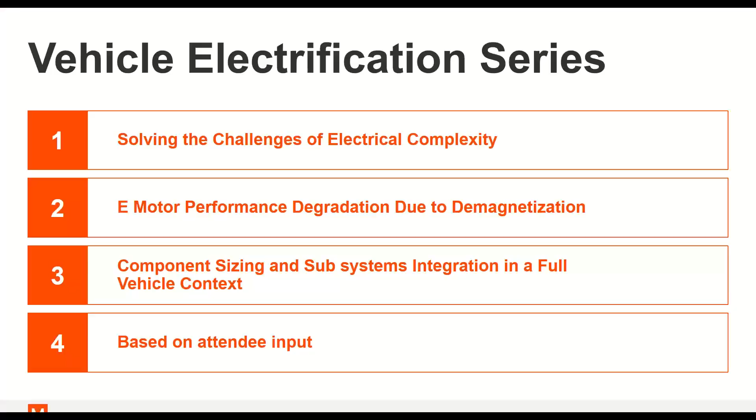As I mentioned, this webinar series is brought to you by Maya HTT, that's where I work along with Mo. Maya HTT is a leading provider of digital engineering solutions and the #1 global partner for Siemens Digital Industries software. Our history is in aerospace, but we have been working diligently within multiple industries on complex engineering challenges for the past 3 decades. In particular, there's been immense growth that we're seeing around the challenges and adoption of software and cutting-edge tools when it comes to vehicle electrification. We're excited to be working with clients all across the world, but in particular in US, Canada, and the UK in relation to this domain.

Today, we're covering only a small subset of our expertise and knowledge base, but it goes beyond electrification and beyond integrated electrical systems. One of the areas we're working on goes into helping companies create their own digital twin representations of physical models. This could be in the design and prototyping phase, in manufacturing, or even out in the field. We're seeing tremendous interest in AI applications, being able to capture data related to something active in the field and turning it into valuable information through our knowledge, algorithms, and technology. The knowledge we have of industry best practices does position us well to support our customers in achieving those goals. There's a lot more we can talk about, and if you have questions in these other areas, don't hesitate to reach out to the people who invited you, or send it directly to us afterwards. But today we're really going to be focusing on electrification and integrated electrical systems.

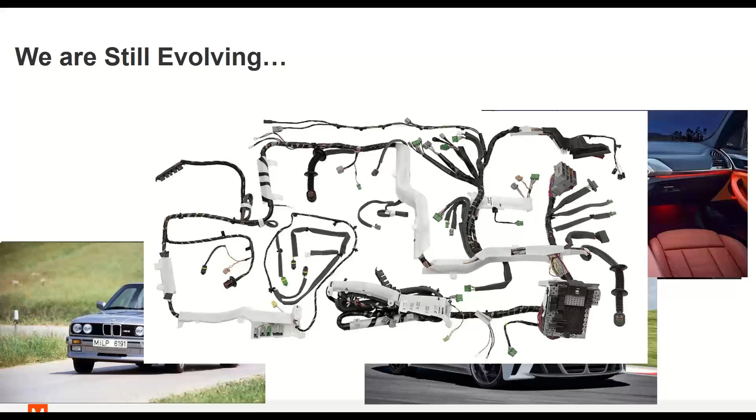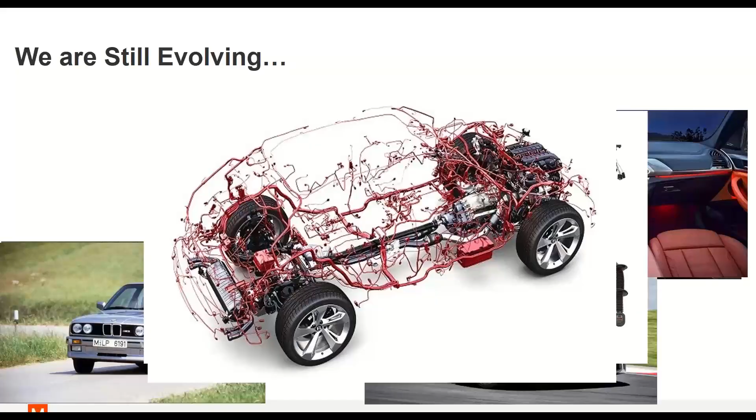Paul, can you hear me? Yeah, I can, Mohammed. You can hear me? Yes, sir. Oh, excellent, thank you very much, Mohammed. That was thought-provoking. Let me see. All right.

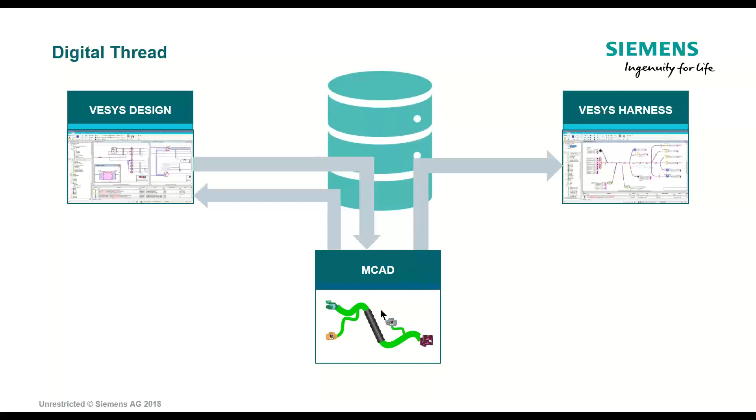And both visualizations, or both abstractions of your design, can interact with another domain through adaptive bridges. In this case, a simple representation of an MCAD system. So that's an example of a simple digital thread.

Let's just take a look at what it looks like not to have a digital thread. Like I said, electrical engineers have been traditionally poorly served for advanced tools. And it's by no means unusual to see non-specialized tools. Nothing wrong with Visio, nothing wrong with Excel. However, electrical engineers usually end up disappointed because there's no underlying intelligence or associativity. And any changes that ripple through your designs, if you use those two tools, you have to painstakingly follow through the change and check lists of things.

Specialized tools also have the potential to disappoint. If you have a specialized drawing tool just for drawing activity instead of design, then you could run into problems with change management again for engineering changes. The drawing is not itself the model, it's a manifestation of the model or a representation. So something that can manipulate a drawing may just be manipulating a representation of the drawing rather than a model with fidelity to the underlying nature of the design.

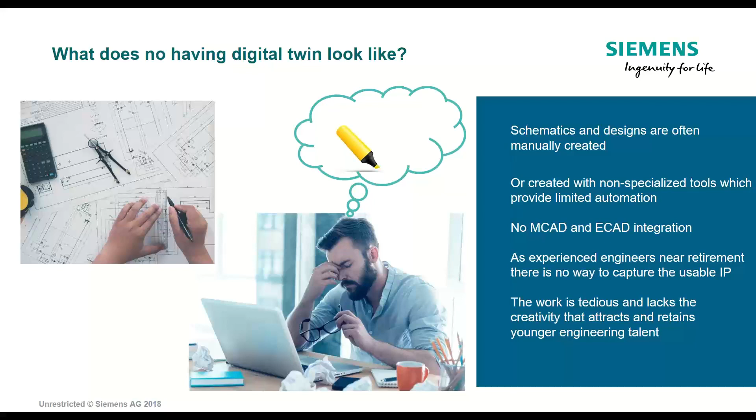So using suboptimal tools is no longer sustainable for complex designs, for big designs, for designs which change quickly, or huge projects of design. And systems like VeSys enable you to cope better with those challenges.

And from really the kind of molecular level upwards, I'm showing in the database, customers like IVI model first the individual symbols for devices and interconnects. And then the library data models enable you to model complex multi-conductors.

This is by no means the most complex that you can model, but you can see it's foil wrapped, it has a twisted shield, a jacket, and I think there's 6 conductors in there. Knowing the difference in your design as to the different cut lengths or the different terminations of these inner cores is something that a specialized tool really should deliver to you.

Here's a modular connector with different size pins, different inserts, and so on, and very many permutations possible. So the underlying library model, even with simple mechanical parts like tapes and tie straps there, is an important component of getting the schematics that you're authoring to pass the design rule checks so that you have quality assured. There's a substantial amount of design rule checks built in.

One of the things I want to talk about, referencing back to the digital thread aspect of VeSys, is this - a couple of screenshots from inside of the harness part of the tool. And you can see that there's text messaging or team collaboration opportunities.

IVI maintain a separation between the people that produce the CAD drawings and the engineers. This is a seniority and specialism demarcation that is quite common. One interesting thing about this workflow is that it's particular to IVI. There are a number of other VeSys customers I've worked with who make their engineers responsible for the drafting, verification, and modification of their own drawings. It's an indication of how VeSys can be flexible in how you deploy it into your organization.

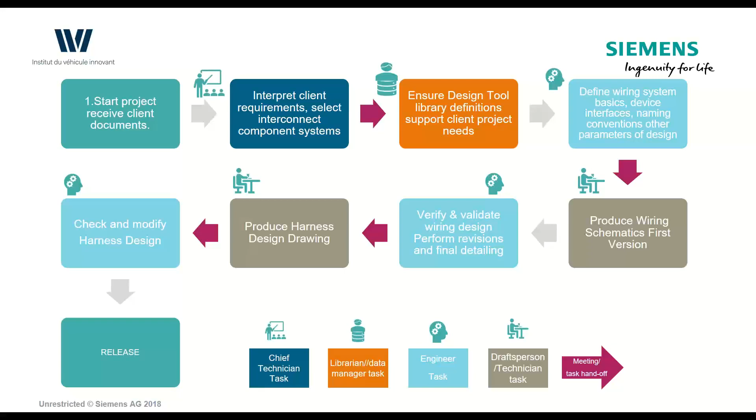So let's just revisit that straightforward digital thread. I've marked up a few of the practical consequences of using this advanced tool. If you take away one thing from Mohammed's exposure of some of the functionality, I want it to be how intensely practical your experience of using VeSys can be. It's a system that hasn't grown out of a mechanical CAD suite of tools - it's been purpose written for electrical design. Therefore, you can expect this system to just understand your engineering challenges.

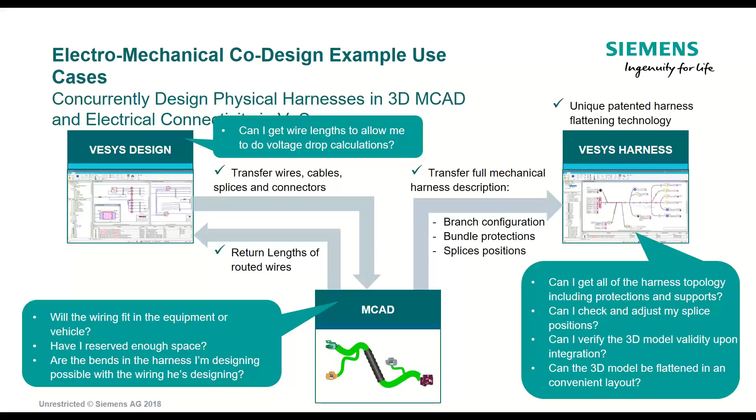The summary - I want to say three more things about VeSys. It's a mature software suite that's been proved out over the last decade by customers literally around the world. The consistency of data handling, with the sophisticated domain-specific models we talked about - the digital twins of the elements of your design - makes for a really comfortable recognition and familiarity with the functionality as you learn the tool.

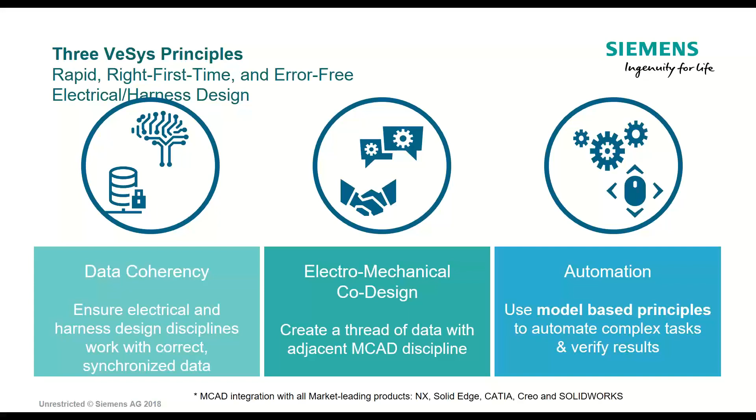And finally, the advanced automation that's possible is one of the more pleasing aspects for IVI as they've gotten into using the tool. They realized that what one customer called the gritty, repetitious manual tasks they had to do fade into the past and are no longer part of your design activity. Thanks, Mohammed.

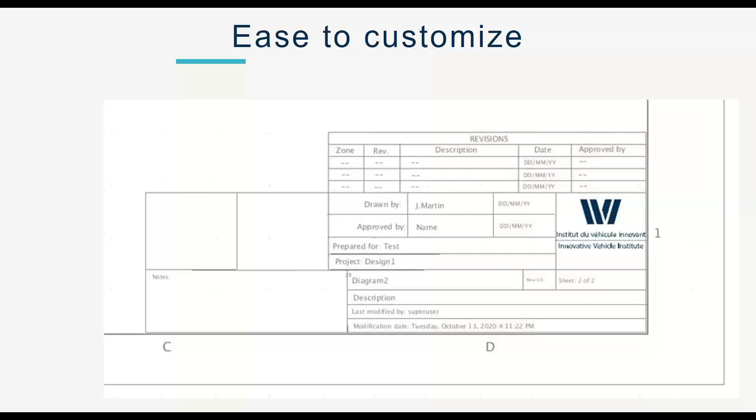The VeSys software is easy to customize. I'm showing just a cartouche here, but things that are sometimes very complicated in older software happen because they started as mechanical CAD software and then moved to electrical CAD - it makes life more complicated and difficult because it's not a seamless way to work. It's a different way of thinking because it's like a patch, instead of being a software built from scratch.

The library, I think, is the very, very important part of the software. The way it's been built enabled us - I'm showing an example here where we had a contactor with an optional part. In order to build it in the library and have it as an option when the schematics are done, it's something we've never been able to do in the past. We had to do a manual black box, and it wasn't always easy to control in the schematics, and then when going into the harness design it was an absolute mess. So I'm showing this to give you an example of the possibilities of the library.

I'm also an IPC A620 instructor, and I also teach here at the college the D620, which is harness design, and that brings me to all the information that we need from the software. When I teach the students at the college about wiring design and wiring assembly, you need as much information as possible on the drawing. We've been able, just like Paul showed earlier, to have notes from collaboration between different teams or different people working on the same drawing. It's a very, very easy way to work.

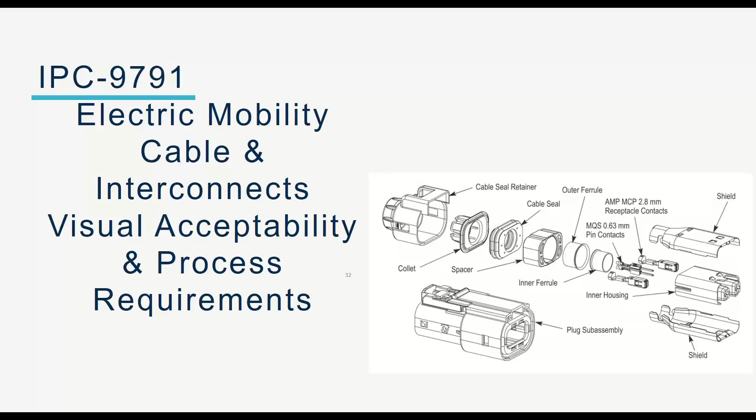We had some issues in the past when using older software, Excel spreadsheets, and Visio, like Paul was saying - these are some of the tools we used before, and we had some problems and mistakes. Now with the new tool, going from schematics to harness design and form board, I've been able to verify that there's actually no parts missing.

Yeah, I think that's yours, Mohammed, isn't it? Yes, thank you very much, Bernard, for your time and the amazing presentation.

Thank you very much. Now let's take a deeper dive into the tool Ben and Paul were both talking about, which is VeSys. We're going to break down VeSys into 5 main categories.

We'll talk about how VeSys helps you maintain an up-to-date component library, as well as establishing the links between those components. And just as Ben mentioned, it's extremely important to maintain your database. From our experience, VeSys helps streamline the process by creating links into the components and component libraries. And of course, once you've completed your first design, you'd need to validate it.

We'll discover how we can validate your design with different simulation tools available off the shelf with VeSys, in addition to tracking and exchanging notes and comments between the different engineers and technicians teams working on the design.

Electrical engineering is inherently multidisciplinary. You have different teams, different technicians, different engineers working on the same project. Integration must be provided to make sure that all the processes and documents are consolidated. VeSys is built to integrate through data exchange with adjacent domains using industry standard formats.

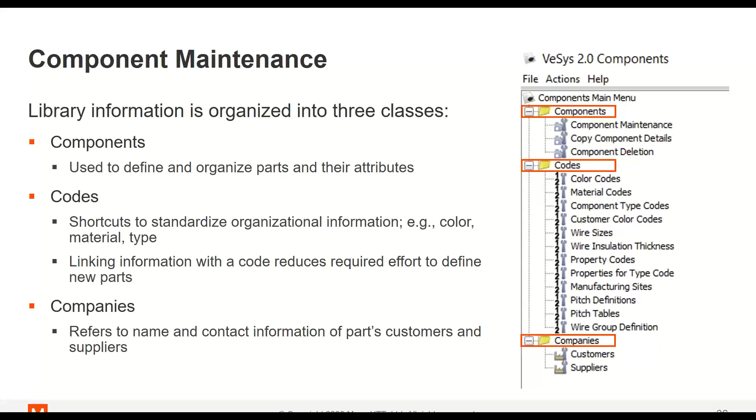And of course, the last thing is the components, to manage the components themselves, to add new components and create links between them, covering the link between all the components Ben was talking about. The idea is that by establishing those component links, the user can extend the digital thread from the components database all the way to the design.

So VeSys is not just a drawing tool. As Paul mentioned, VeSys represents the design behind the drawing, the fidelity of the design. By utilizing these component links, you'd be able to link those components and use them once established in the database. Now let's jump into VeSys and quickly build a system to show you how component links work.

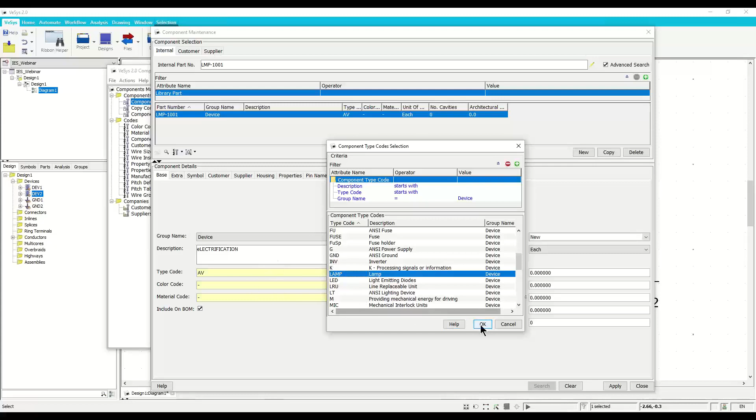The device, we're going to give it a description, call it electrification. The type code is the type of device that we're using. We're going to go into the codes that we define from the libraries and select lamp, and we have 2 pins in our device.

We also assign a symbol to the device. So we're going to go and add a new symbol, so whenever we use it, we have it there. It's going to be in electrical, and the symbol is lamp. So let's find the lamp, and that's the lamp.

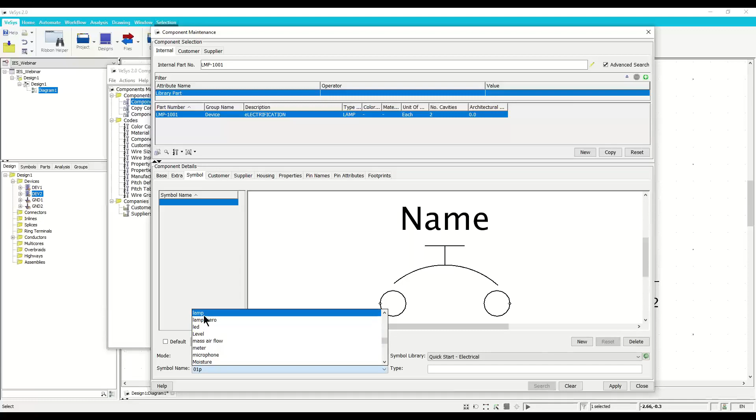Apply. Yes. The next thing is, once we created the device, created the pins and the symbol to be assigned, we're going to use the component links and define a footprint for the device. Essentially, a footprint for a device is all the connectors that could be used with that device.

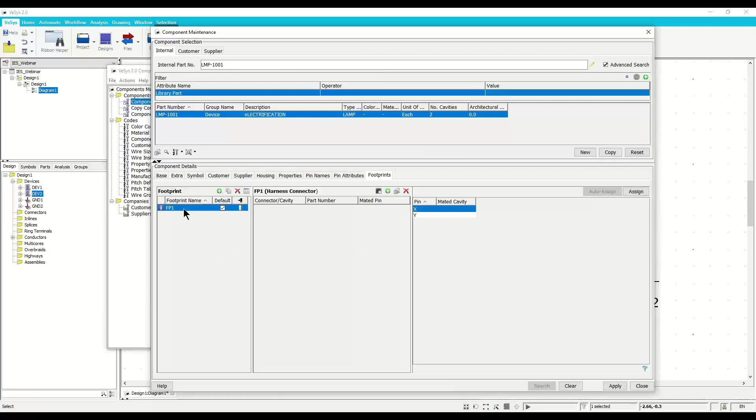Each device can have more than one footprint, either one on the device side and one on the harness side. So you can either have external connectors that connect to the device, or connectors inside the device. So quickly, we're going to create one, it's footprint 1, and you can see it automatically detects that the device has 2 pins, X, Y, and so far there is no harness connector added.

So we're going to add quickly a part number for the connector. This essentially tells VeSys that whenever we have this part number, LMP 1001, connector C-81333 is always used with it. So with that, VeSys establishes the connection, makes sure that the pins are mated, and with that, we have our connector. Now, the device has a connector assigned to the footprint.

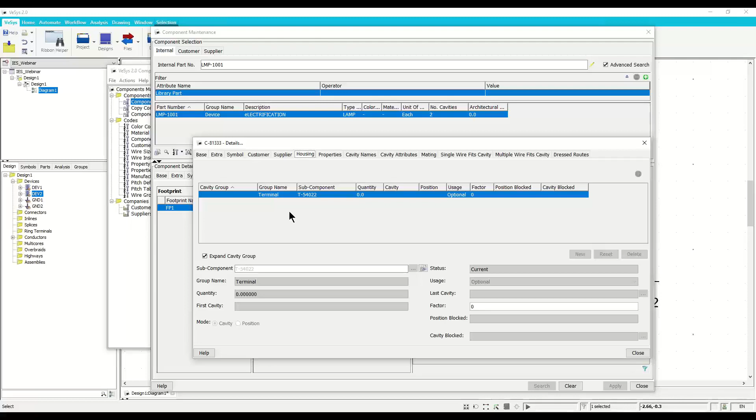Now, if we open the definitions of the connector that we just assigned, we're going to notice that even the connector has a terminal assigned to it. So essentially by this, you're maintaining your connection all the way from a device to the terminal, and you can even extend it more by adding wires and so on. This is a very smart way to have all your links together in the same design, in the same library. So whenever you use them, you have everything, and all the information is included in the bill of material and all the project documentation, as we're going to see after.

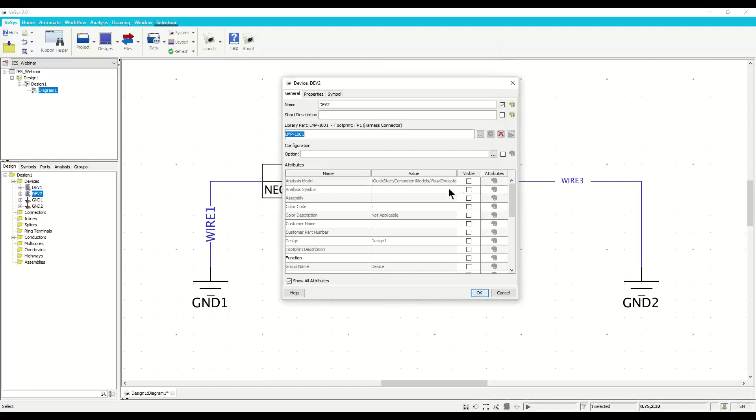So let's jump back to our design, refresh, because we changed the database, open and assign our part number, LMP-1001. It tells us what's going to happen because of the pins, just the names, we accept that, okay. And just like that, now we have our part number assigned.

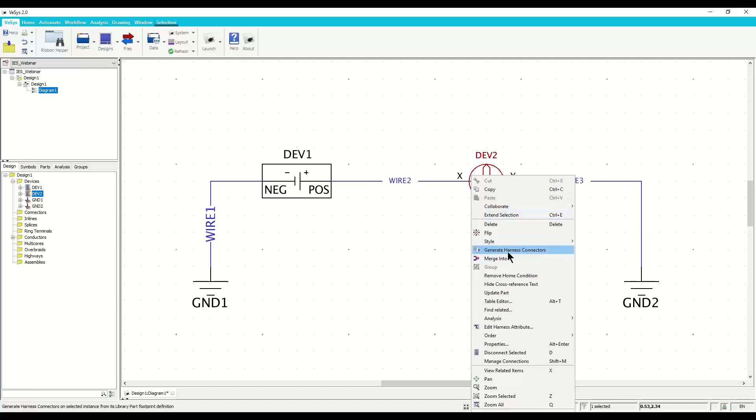Now this is the part where it gets interesting. We're going to create the harness connector for the device from the database. We're going to leverage the link that we just created. So I'm going to click the device and we're going to automatically generate the harness connectors. VeSys goes into the database, fetches the information, creates the plug or the seal or the connector or whatever, and automatically connects it to the device.

This is a smart and easy way to leverage the component links in your database and extend the digital thread line from your database all the way to your design and the documentation. So VeSys is not just a drawing tool, it's actually a platform that allows you to innovate in your design. With that, let's jump back to our presentation and continue from there.

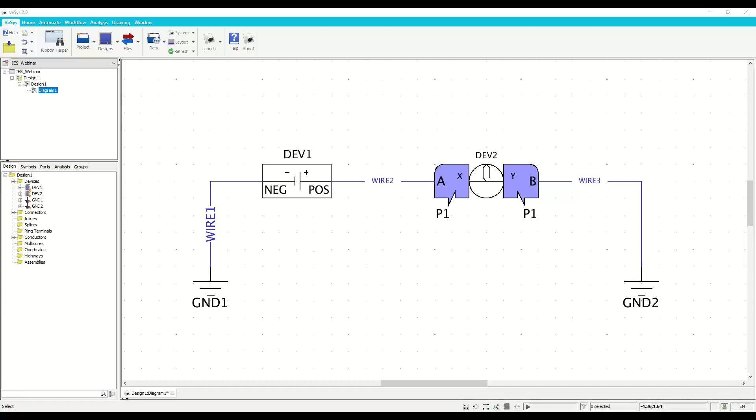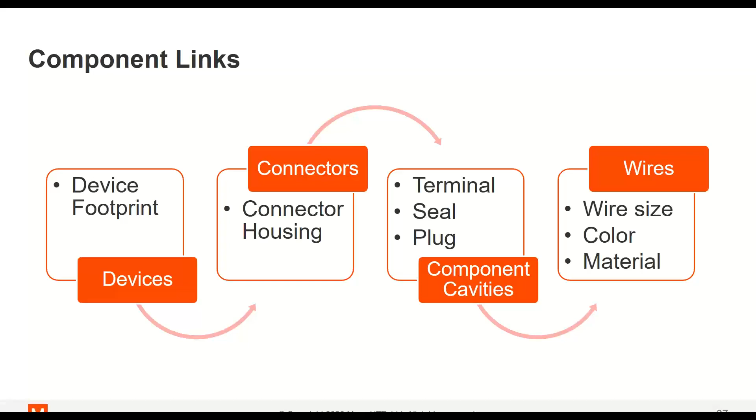This is an extremely important functionality because once you set the link once in your design, it's all set. In your database, you can use it in all your designs, and it's automated, and it saves you a lot of time and effort.

So the next step is we're going to look at design management and design verification. Because as we mentioned, once you create your design, you're already protected by the first line of defense, which is the design rule check inside VeSys by default, but you always have to double check your design. Maybe there is something wrong in the design.

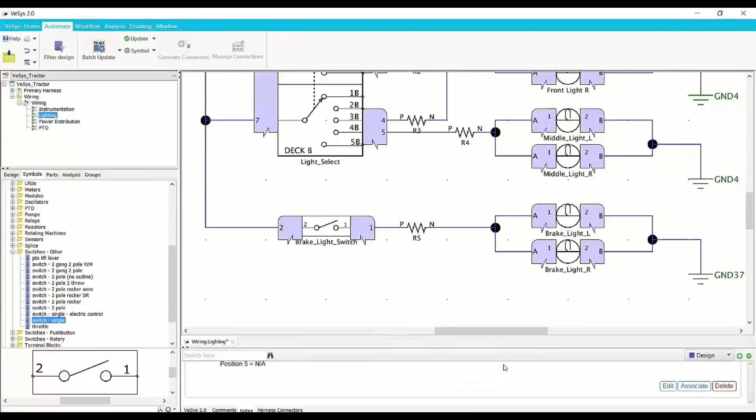The designer adds the note to the verification team and associates the components in question to the note, making it easier for the verification team to locate said components. Simply selecting the components in question, they're automatically assigned to the note. And this note is always attached to the project. You can always access it and have the history of all the notes in the project.

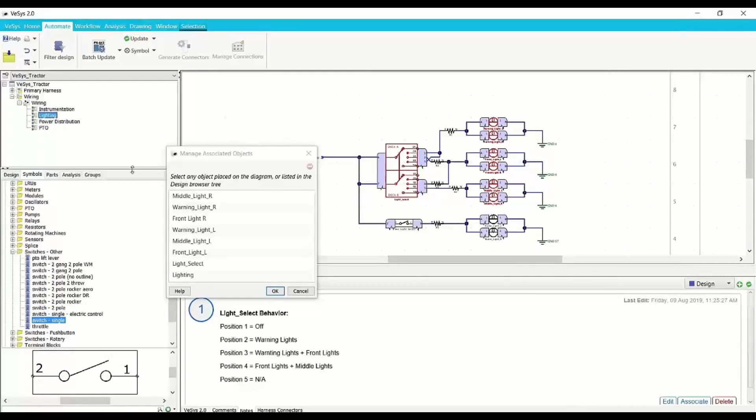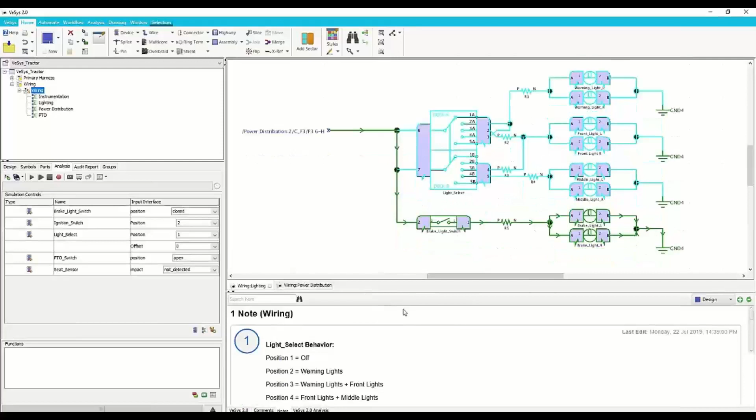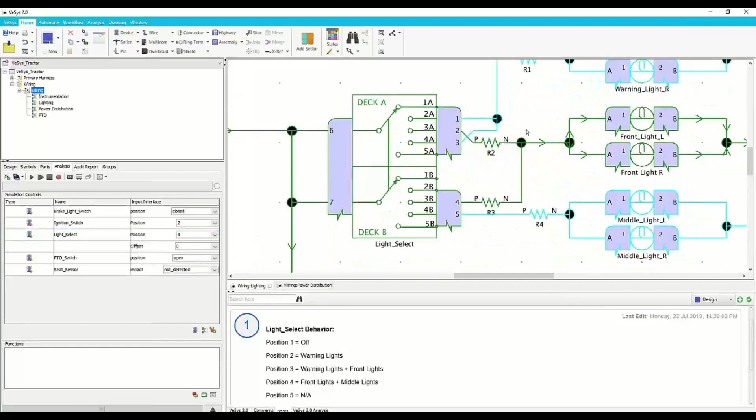The verification team then opens the note, locates the components in question, and starts the verification process. Based on the note left by the designer, the verification team begins the verification process, testing the different positions. Just like that, quite quickly, the verification team notices an issue with the design, immediately replies to the comment, associates the component in question, and suggests the recommended fix.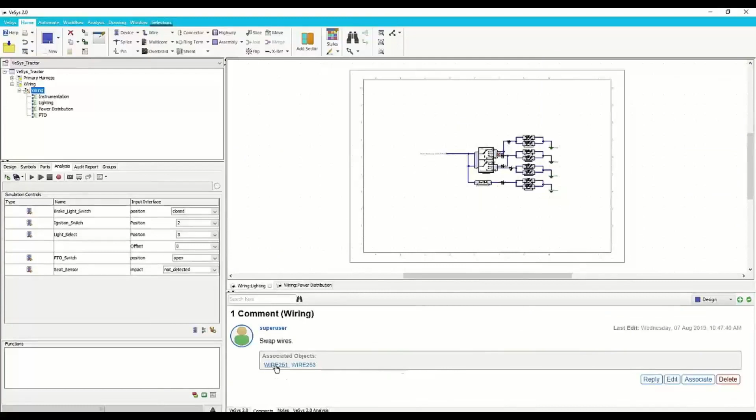The designer gets back, sees the note from the verification team to switch those specific wires, for example, in this case. All the designer has to do now is go back to the design and fix the issue based on the recommendation from the verification team.

This is very straightforward. All the history is always attached to the project, so you have a list of history changes in all your projects and the communication between the different teams. From our experience, this is extremely important to have this history in the project so you can always see your design trends and make sure you have an open channel of communication between your design team and verification team.

Again, we go back to the main challenge in electromechanical design: the ECAD-MCAD collaboration. Usually in the design, you have electrical teams and mechanical teams working together to finish the design, and the nature of the engineering process is that multiple engineers are working together and need to exchange data. Being able to exchange data between all teams involved is of the utmost importance for a better, quicker, and less risk-prone design.

The electromechanical process is divided into three main tasks or objectives. You have the schematics, developed by the electrical team. You have the actual CAD electrical routing, managed by the mechanical team. And of course, you have the harness design, the nail board or form board, worked on by both electrical engineer, mechanical engineer, as well as technicians.

To start the process, the electrical team creates the schematics and sends the information of connectors, wires, cables, and everything to the mechanical team. The mechanical team then imports the data, assigns it to the 3D routed application, and sends back the wire lengths to the electrical team. The electrical team uses this information to incorporate it into the design and complete a more accurate simulation and verification, to make sure, for example, the voltage drops are accounted for. Of course, this process is repetitive to make sure you get the design correct.

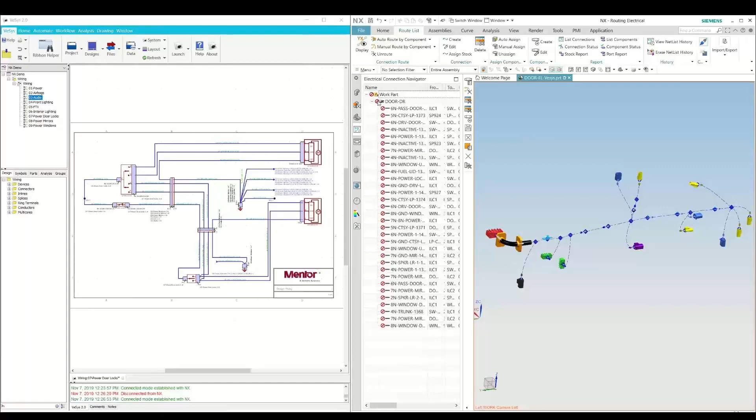If you have more than one splice, or one component with the exact same part number, you have to do a manual assignment. However, everything else is done automatically. The wires are brought in automatically and the harness is generated.

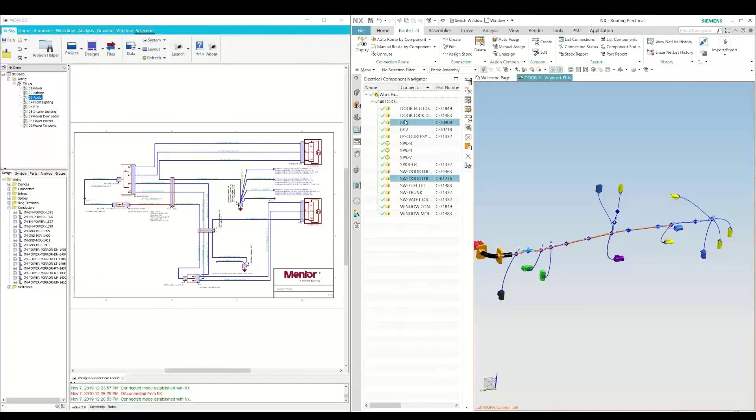Now, the importance is once you establish this connection, you can achieve an ideal collaboration situation where you can actually cross-select between the two designs. If you highlight a component in VeSys, it highlights in NX. If you highlight it in NX, it highlights in VeSys. So this way, both engineers can work on the same design at the same time, regardless of location. They don't have to be on the same machine, they don't have to be in the same building, even. It could be different teams on different sides of the country. So this is extremely important.

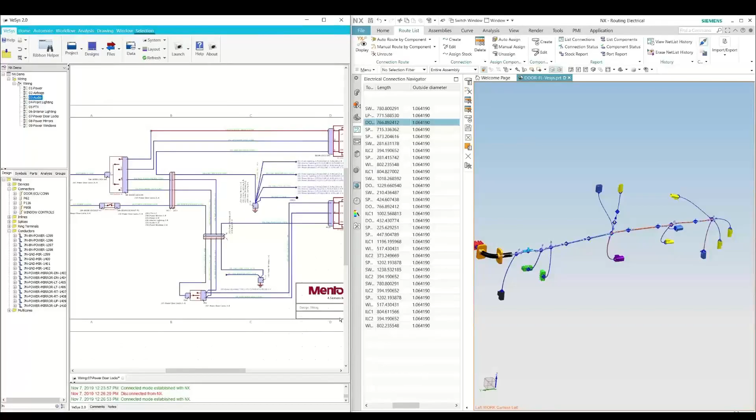Now we're going to send the information, the wire lengths calculated from the mechanical team, to the electrical team. Once the import is done, we can see all the information is brought over into the schematics, and if you click any wire, you'll notice the wire length is added to the design. This is the first part of the workflow.

Once the schematic is built and added with the wire length, the mechanical team then starts the process of creating the actual harness. That means sending the data from the mechanical team to the technicians to actually build a harness and the 3D design. Let's see how that process looks like.

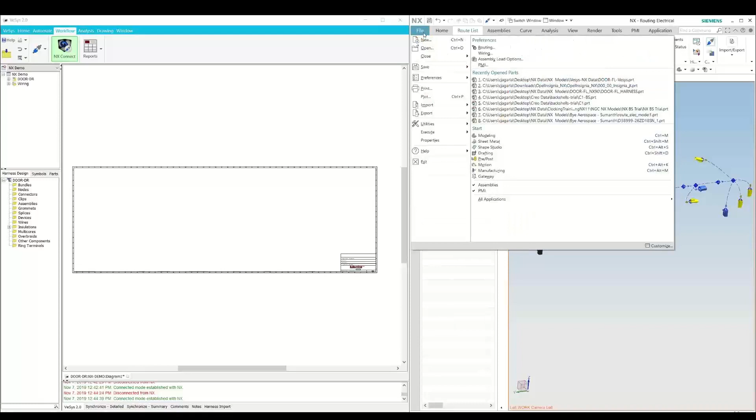Again, we have the same setup: on the right-hand side, we have NX, on the left, we have VeSys. On the right-hand side, we have the fully routed device with no wires, just the components. What we're going to do is send the information, the routed harness, into VeSys. As you can see, we start the process and the data is brought back into VeSys, where we can reuse the data instead of building it from scratch.

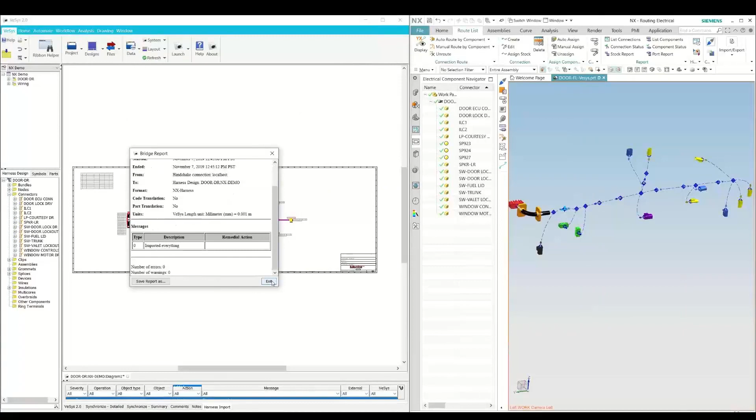Data reusability is very important. You select it, and it saves time on both teams. So you select the flattening process, and just like that, you have your 2D flat version of your 3D harness into VeSys. Again, the same functionality stands: if you cross-select, you can cross-select different components and make sure you highlight them together. So it allows for even more collaboration between the teams.

Essentially, this is the ideal workflow between the three sections that leverages data and makes sure that the data is used between all teams, and time is saved between all the teams involved in the design.

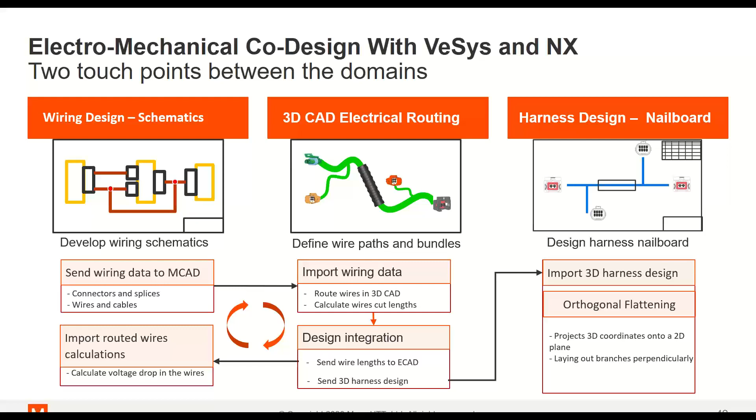So that brings us to the automation side of VeSys. It goes into design synchronization and part number selections, but the idea behind this is to save time and utilize the data that was already created in the design. It saves you time by not creating the data again. Data reusability is a very strong feature in VeSys.

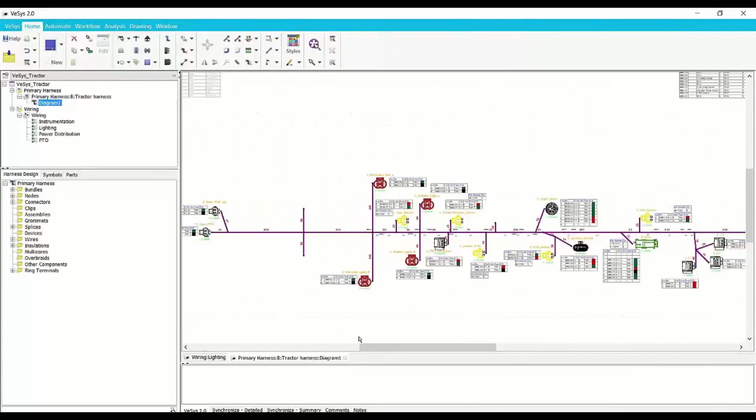In this video, we're going to look at the design. It's the same design that we just verified. We're going to start building the harness. We'll see that the harness is partially complete, with some parts still missing. What we're going to do now is use the automation in VeSys to complete the design by using the data that was already created in the schematics, so we don't have to recreate it again.

Simply by selecting the devices and the components that you'd like to bring over to your harness, we'll be able to complete the synchronization successfully.

Again, making sure that you bring in the correct information, the correct components, by filtering them out and making sure that you assign to them the harness that you'd like to synchronize.

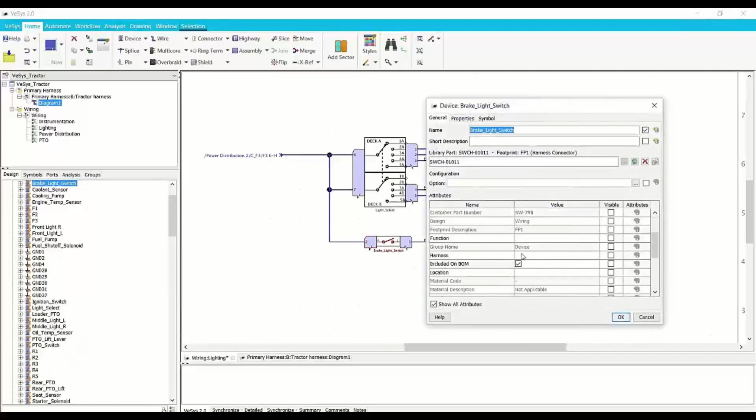We're just finishing up adding the components, and with that, we're ready to synchronize both designs.

Starting the synchronization automatically brings in all the data defined in the schematics to the harness. All we have to do now is connect the newly added connectors to the harness and the bundles. No need to recreate everything. Everything is already brought in automatically, and the data is reused from the schematics.

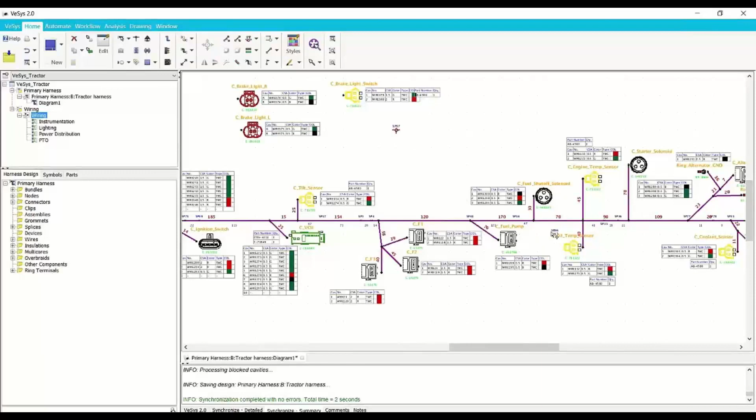This is extremely important to highlight. You don't need to spend more time recreating your work. It's already done. All you have to do now is connect your components into their locations on the bundles.

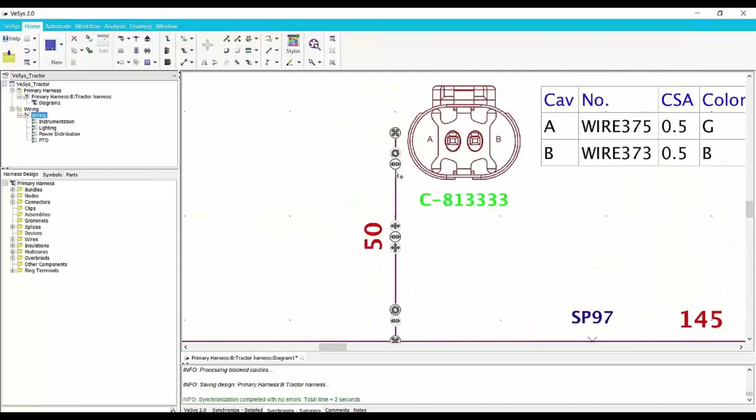Once all the components are added, you finish customizing your bundle based on your design requirements, your standards, and your company standards, by manipulating the bundles easily. As you can see, it's quite easy and straightforward.

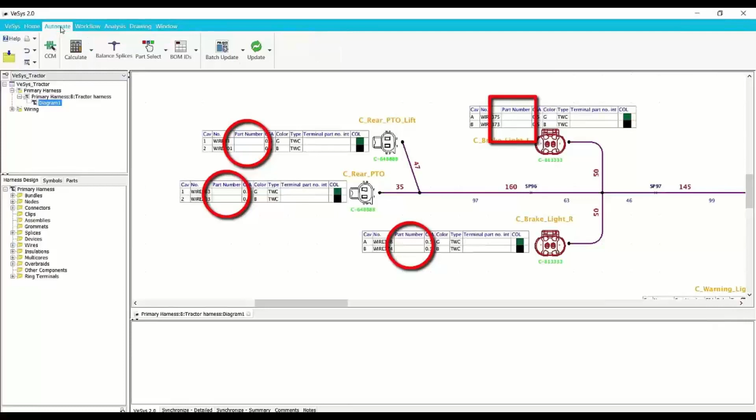The next step, once we have the missing components, is to start assigning part numbers for the wires inside the design. We're going to leverage the automatic part assignment. The part numbers are automatically brought in from the database, leveraging the links that you established in the first place.

Then we're going to move to leverage the automation to calculate the wire length automatically. With one click, all the wire lengths are calculated and part numbers assigned.

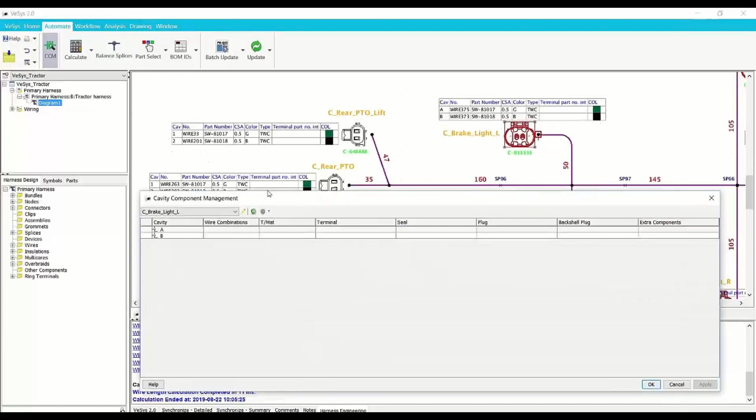The same process extends even further by assigning the housing components and the cavity components of all the connectors automatically, either by doing it for a particular component one by one, or leveraging the automation to assign it for all other connectors.

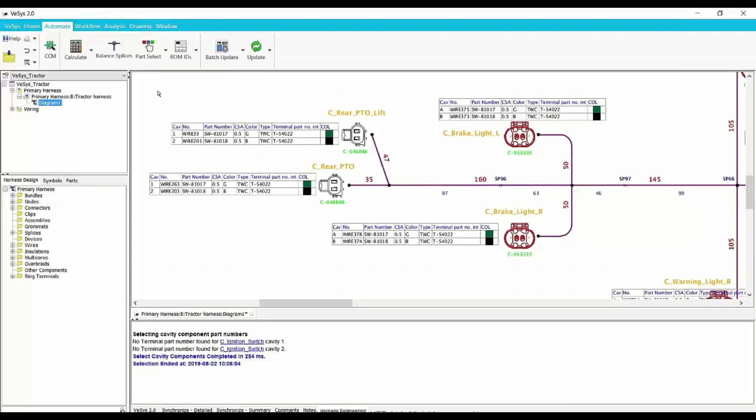With that, we leverage the automation processes and functionalities in VeSys to streamline the design process, streamline the design stages, and reuse the data that's already available in the schematics and the 3D routed application.

The last part to highlight is the reporting. Reporting is extremely important because we need to think about how much time we spend creating design documents such as bill of materials, wire list, and part list. And how do we share these documents, and how do we customize such documents as needed?

So let's jump back into VeSys and see how we can leverage the built-in reports and customize and build our own reports. But before we jump to VeSys, let's do the final poll.

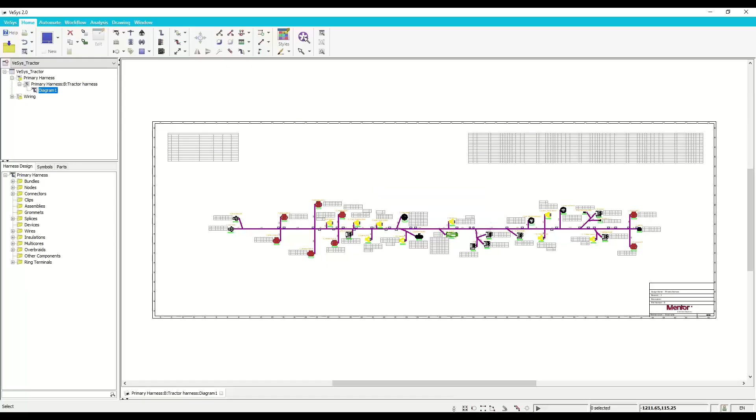Thank you very much, Dan. The answers are exactly what we're expecting, because documentation depends on the project, the size of the company, and other factors. But the thing in common is that all the attendees who answered the poll spend significant time in reporting. What I want to show you here is how we can leverage the built-in capabilities to do reporting as fast as possible without spending much time on it.

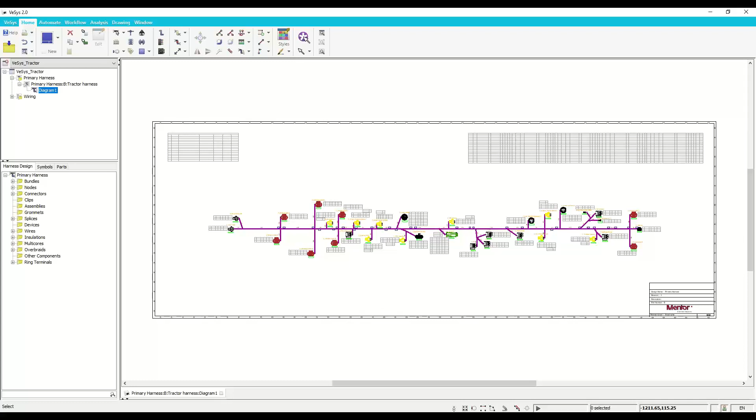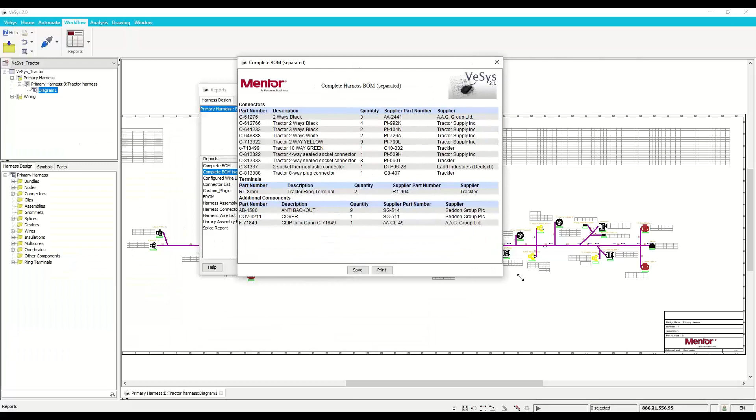This is the same design we just saw in the video for verification. We have all the components assigned, all the part numbers, the bundles are exactly as we want. So the next step is to utilize the built-in functionalities and reports in VeSys, for example, look at the bill of material that is generated on the fly, generated within VeSys. Let's say it's appearing on my other screen here. This is the bill of material of this design, created on the fly.

It shows all the descriptions of the part numbers, the part numbers of connectors, the descriptions, and how many of those devices or components are used. Again, the documentation can be saved, printed, or shared as an Excel file. It's up to you. The documentation is generated on the fly.

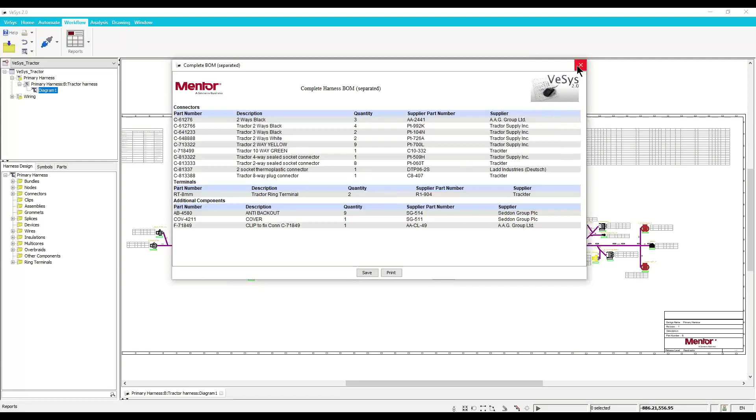Other reports we can look at include the harness wire list, which is also generated on the fly, and we have the full wire list generated. All those reports are built into VeSys. They come off the shelf - you don't have to do anything but select them and print them out. However, if you would like to customize your own report, you can build your own and add it to VeSys, and you'll always be able to print that report directly from VeSys.

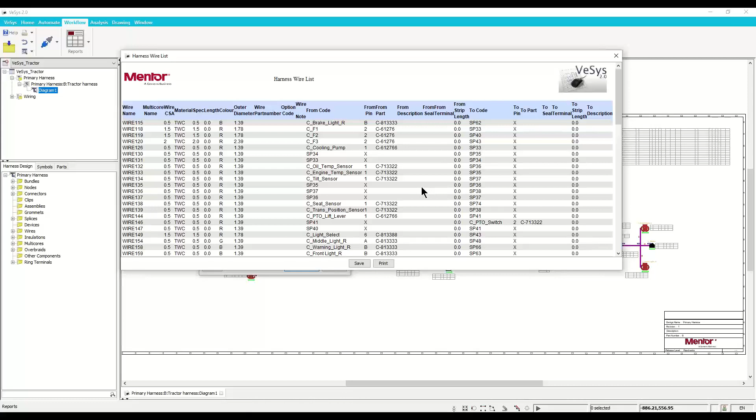So let's quickly show you how we can create a quick from-to report. We're going to open it, and it's showing on my other screen. We need the first column, which is going to be the wire name. I'm just going to include wires - it's going to be an attribute with the name of the wire. Click OK, and a list of all the wires are added with their names.

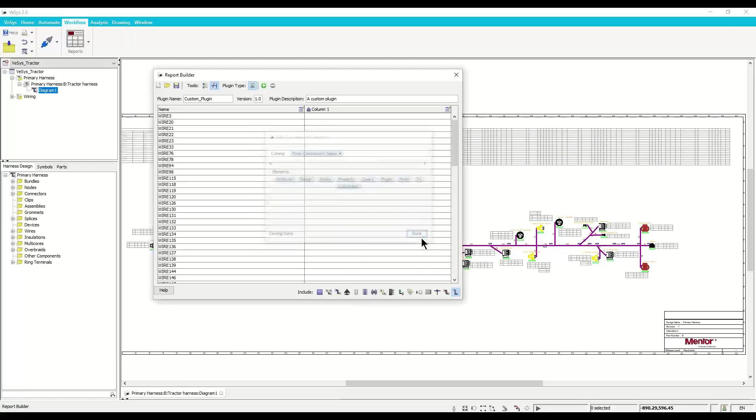We're going to add another column, which we're going to customize to be the from connector. And we can add even text, saying coming from component name. Done - and it says coming from which component. Again, add another column, which is going to be the to column. So it's going to be 'to', and add the text at the beginning 'going to'. And just like that, we created the report we wanted.

You can extend this even to include all the components used in the design. In this case, I'm just using it for wires, as you can see here, but I can control it to add connectors, ring terminals, and splices, and so on.

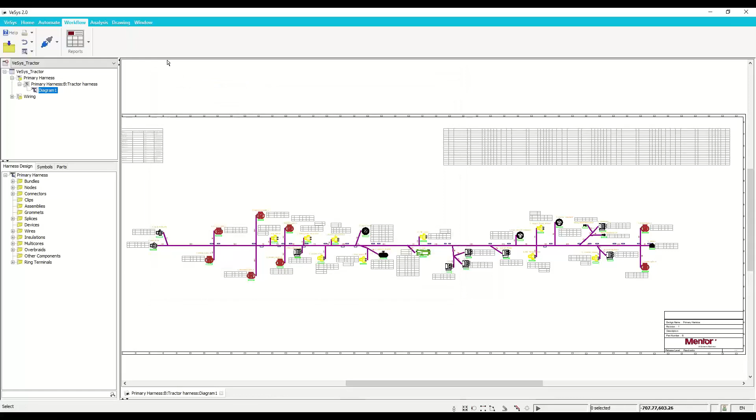Once I've created the report, all I have to do is save it, and now let's print our report that we just created - and it's showing in my other screen, and on the fly we can see this is the report we just created with the information we just added. So reporting is very, very easy, very customizable, and you can tailor the reports based on your standards and your company standards as well.

So with that, I jump back to my presentation, and essentially what we covered today - all the functionalities we've seen today are not only limited to the automotive industry, but you can see those functionalities across all industries.

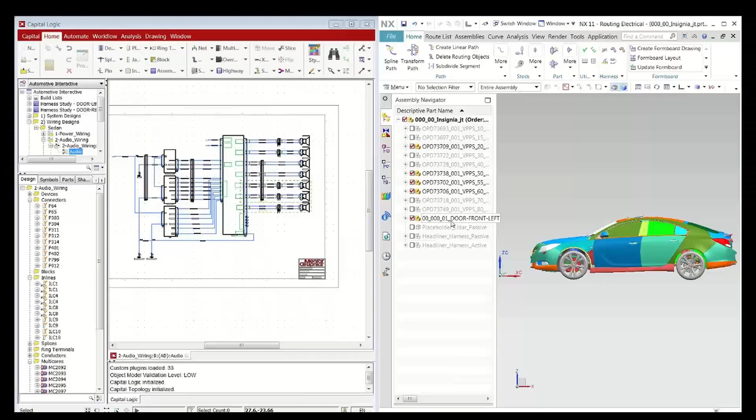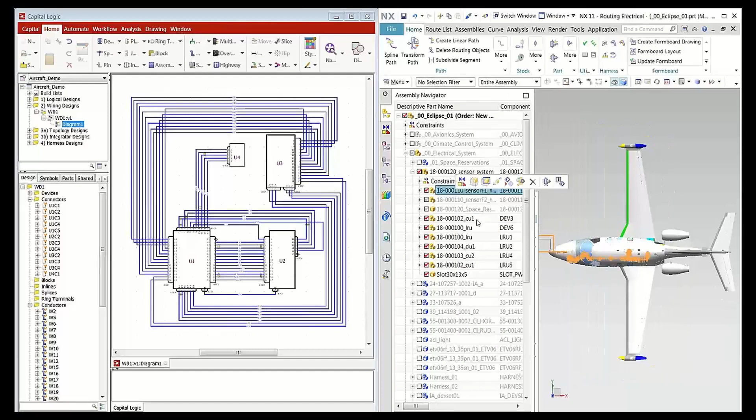For example, what we saw today in the automotive and transportation industry, the same process and workflow is supported for both ECAD and MCAD, where you can cross-select, import, and export information between the mechanical team, electrical team, technicians, and all members working on the same project. The same could be said for the aerospace and defense industry - the same workflow, and this is the value of the tools in VeSys: it's customizable based on the project and industry, so you can tailor the workflows to fit your application.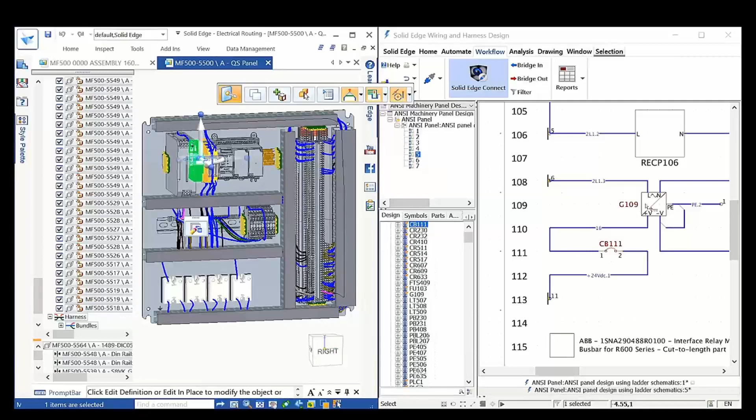The same applies to the electronics industry, where, for example, we're showing this application using the tools to design the switch gear and switch box of this device. So the application extends through all industries - transportation, aerospace, electronics, marine, heavy equipment, as well as medical devices.

The electrical content is always increasing, and regardless of the industry and application, this increases cost and time, and every time something new is added, there is an associated risk. VeSys addresses those challenges by allowing users to automate the design workflow, collaborate between multidisciplinary teams, and reduce design costs. In closing, VeSys provides functionalities that help engineers deliver rapid, right-the-first-time, error-free electrical and harness designs through automation, analysis, and a wide variety of time-saving features. VeSys allows design teams to put their effort where it really counts - into innovation.